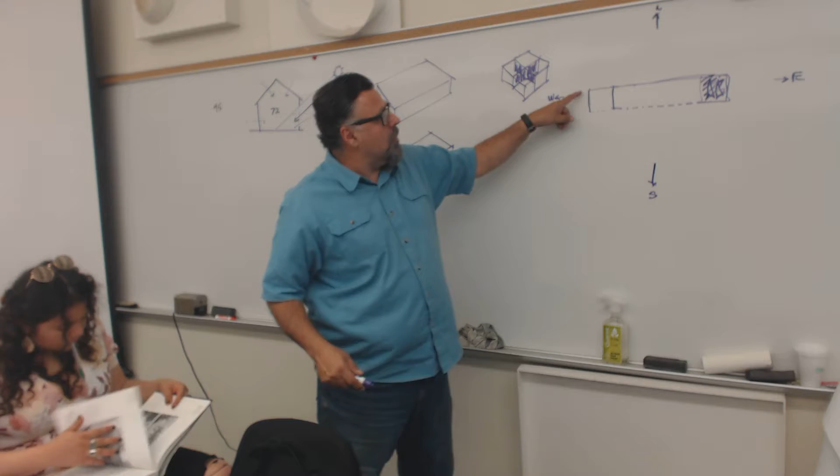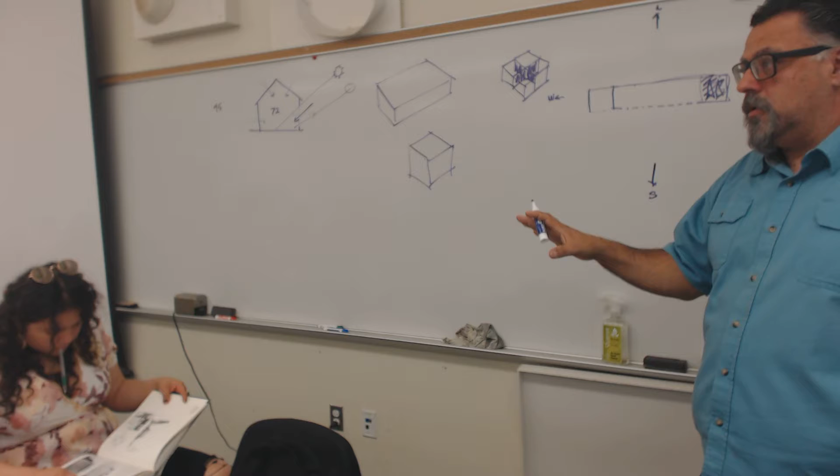Okay, so back to this thing—blind over in here. Let me ask a second question. Again, there is no one right answer to any of this. I'm showing you a potential strategy. That strategy of keeping the building compact is another strategy. Which one works better? I don't know. Which one is more appropriate for the conditions on the site? I don't know—that's up to you to discover.

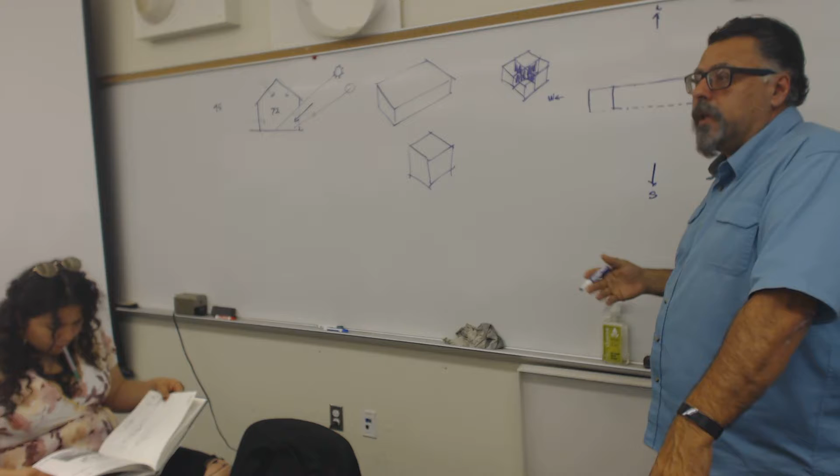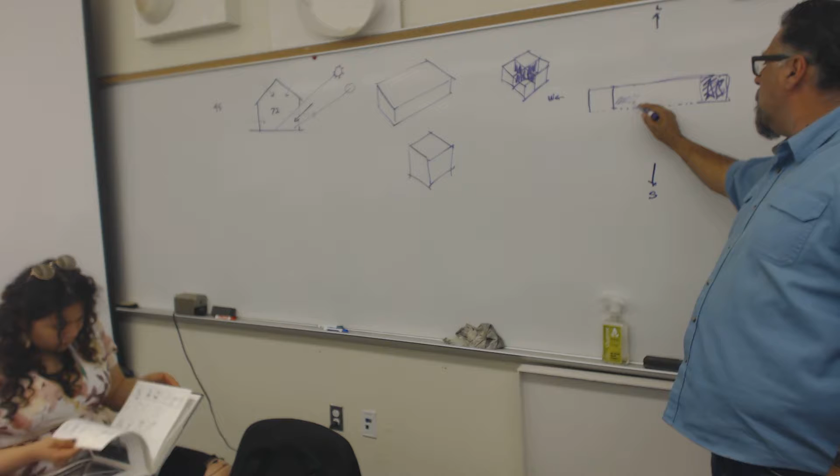But let's talk for a moment about what you're going to be reading about over the weekend, which is passive solar. We know we want a southern exposure with lots of windows so the sun can come in and heat up an area inside the building. But buildings have rooms inside of them, don't they? So one way to approach this might be to put a corridor here and have the rooms off of that corridor.

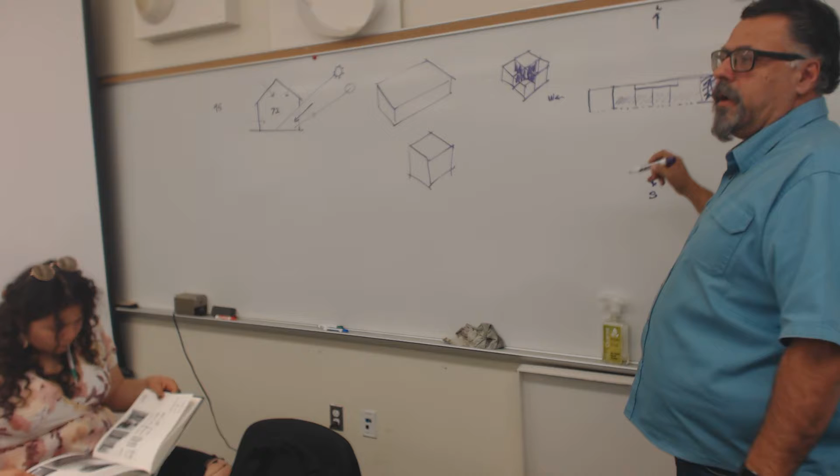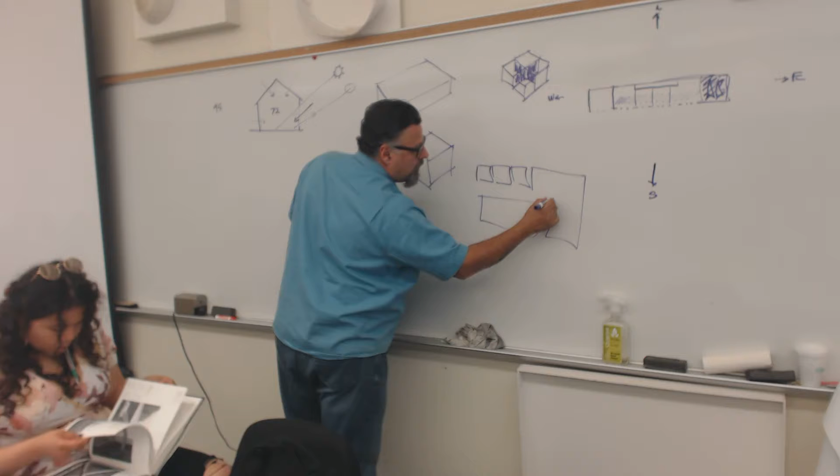So if we do that, do all the rooms pretty much have access to the sun? They do. What happens if you do a different design where you have rooms here and rooms up here, and you put a corridor in between them? Do any of these rooms, or the back of this room, get any of the sun? That causes a problem, right?

Now, there are ways to migrate heat from one area to another. So let me ask a question—do any of you remember from the reading what were the 3 types of passive solar systems?

Isolated heat gain is one type. Another is direct heat gain, and indirect heat gain. The two you're most likely to use are direct gain and isolated gain. It's up to you if you want to use indirect gain.

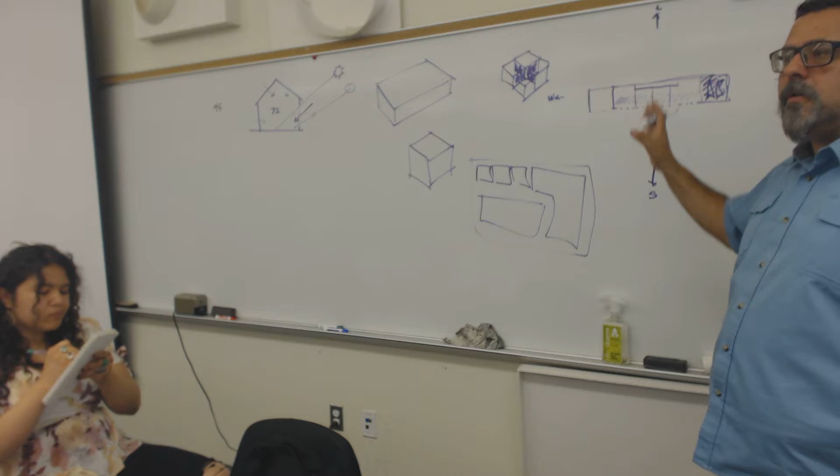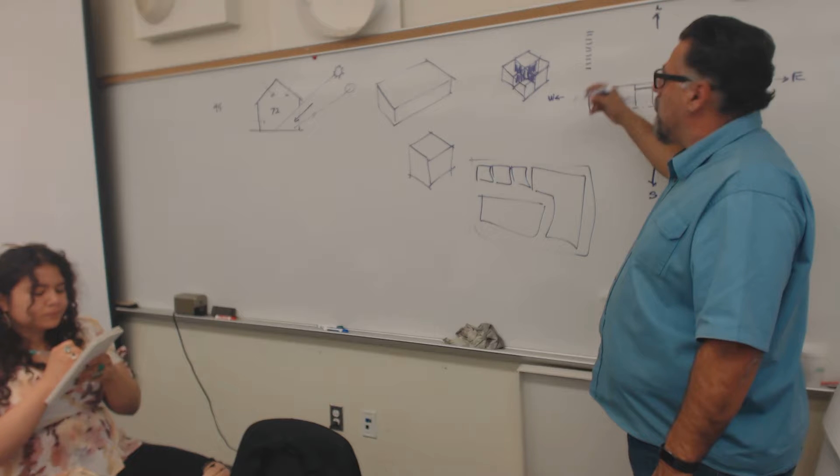So one scenario is elongation east-west. We talked about placing a garage to the east or west and putting a patio with a vertical blind or louver to one side. Another option, if you have operable louvers, is to turn them to let the light in, and turn them a different direction when you want to block the sun.

If you do a little research on the Kaufmann house in Palm Springs, you'll see it has a lanai on the second story, and Richard Neutra put adjustable aluminum louvers across the entire western side of that thing. You actually have to unscrew the hinge and move them. It's kind of cool—of course I was barefoot because you weren't allowed to wear shoes in the house.

Cross ventilation is another issue you guys are going to be reading about. Can you spell that? The house, Kaufmann? Sure.

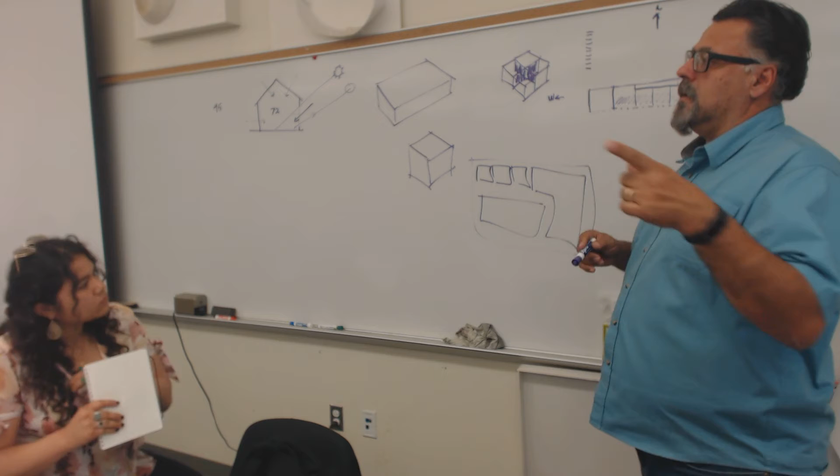Kaufman. Have you ever heard of Falling Water by Frank Lloyd Wright? That's the Kaufmann residence in Pennsylvania. The Kaufmann residence in Palm Springs is the same family, but done by Richard Neutra.

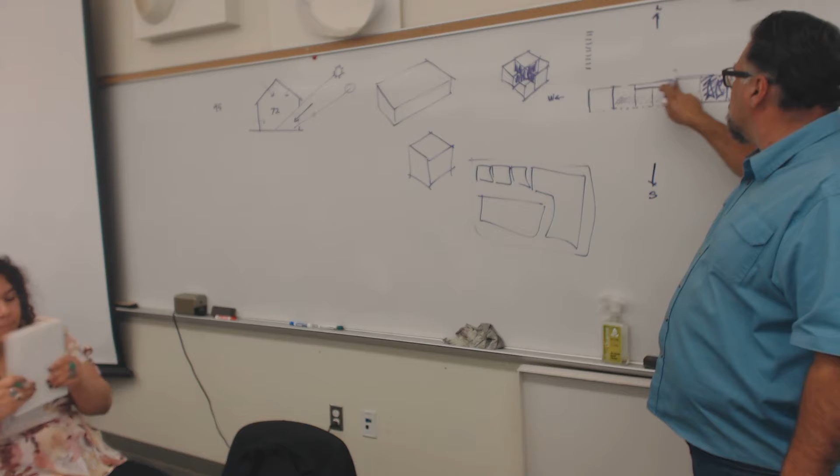So cross ventilation—here's another thing about the elongation east-west and the potential for cross ventilation. If I have windows along here, and some windows back in here, and maybe up high inside these rooms, the wind can come through this thing and get out the other side.

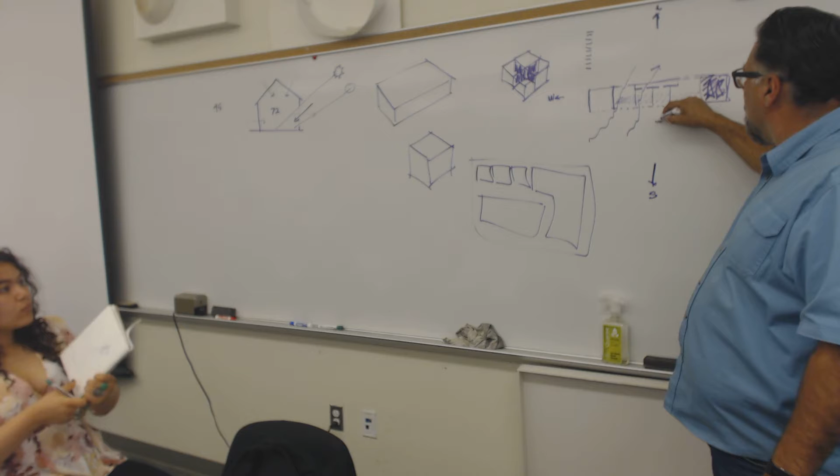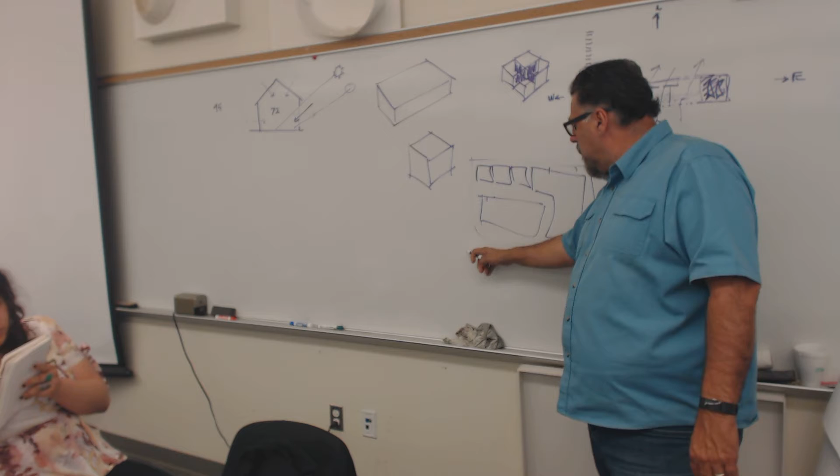But when I stack the rooms really deep, it becomes harder—not impossible, but harder to cross-ventilate. If this is a big room with doors and windows back here, the air creates a positive pressure here, and it eventually works its way out the back.

So there are different strategies for different things. You can, if you want, elongate something and create another piece that goes that way—that's an L shape. So how you deal with this exposure is different than how you deal with that exposure.

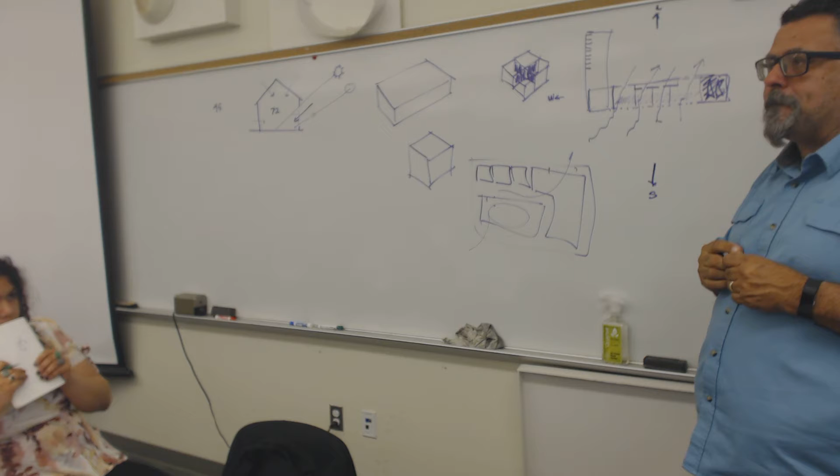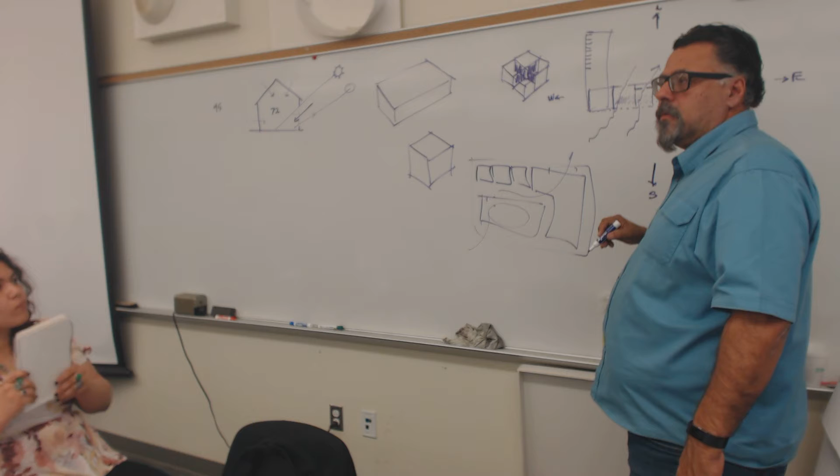So I got a question—let's say I have an elongated space like that and I want to let sun into it. What do I do? How many minutes am I at? Till 12 minutes. So let's say I want to let sunlight into this area back here, but it's nowhere near the south. What do I do?

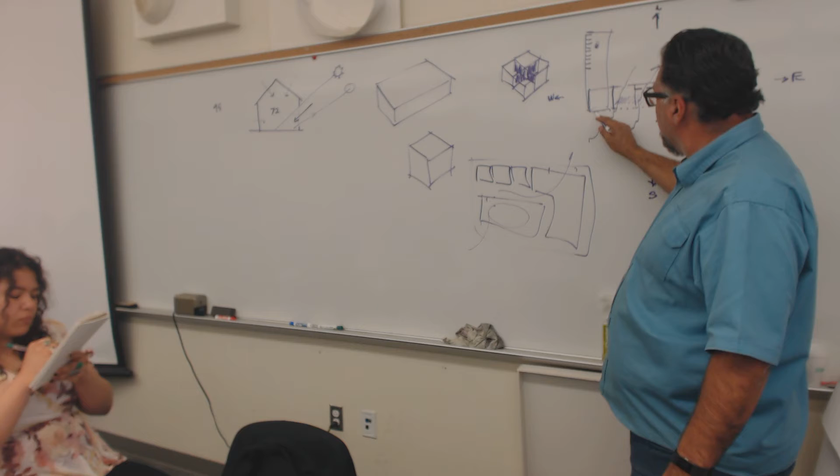Skylight's one option. Can you control the light coming into a skylight? Solar tubes aren't really going to give you solar radiation landing on a piece of thermal mass.

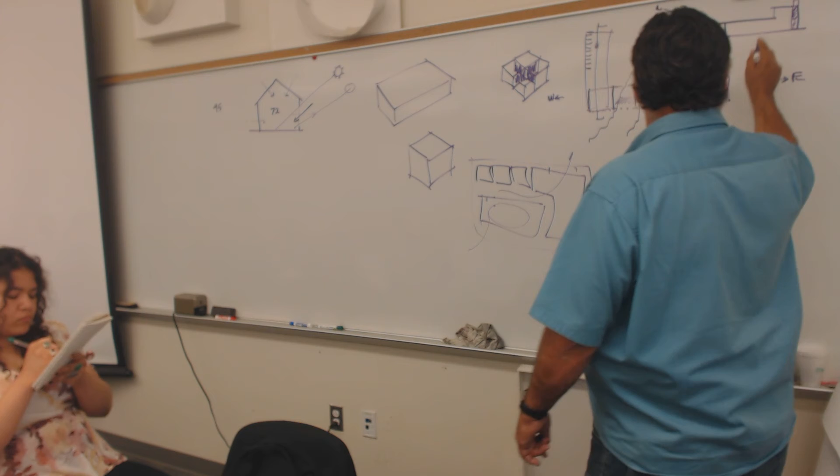Let's cut a section through here and look at a section that could work. Say I have this flat roof and a room here. What happens if I create a tall two-story area here with windows facing south, and a chimney right here made out of concrete, brick, or block? Can the sun get in and heat up that masonry? Yeah—so sectional quality is going to be another factor you guys can consider.

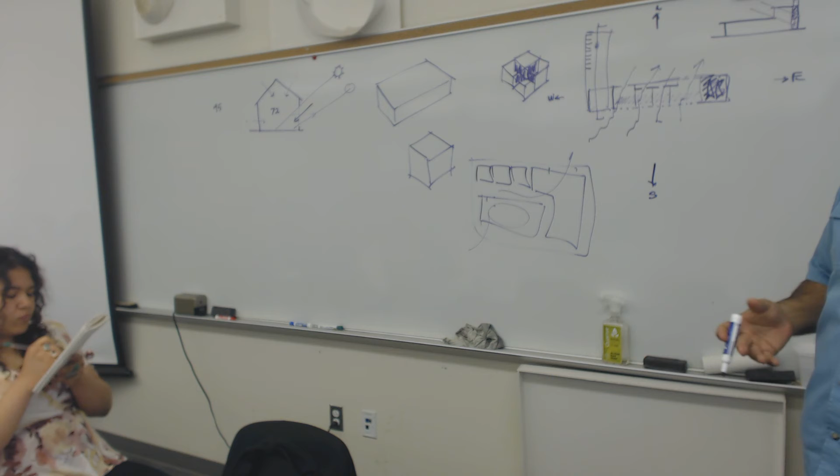One interesting thing is that your site slopes this way. So technically you could step the building down the hill and have multiple areas that let light into something facing east, facing north-south, elongated in the north-south direction—which is the opposite of elongating this way. What it looks like doesn't have to be a box.

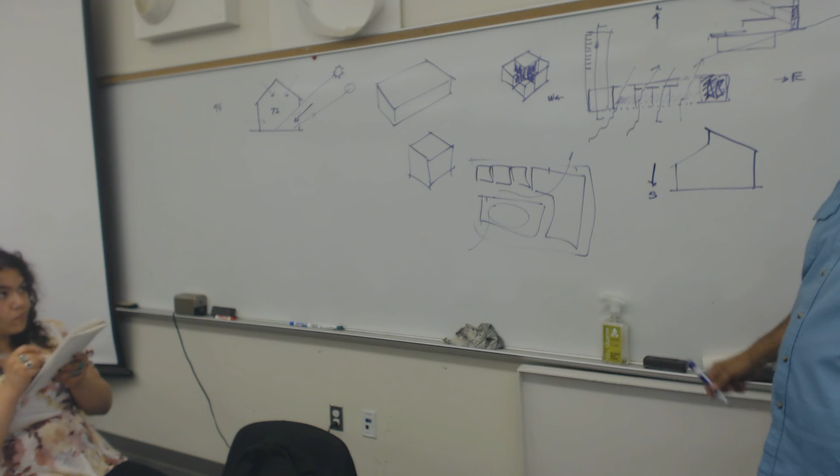It doesn't have to be like the guy I worked for—Brooks Cavan was one of my mentors. I always joked with him later in life that his buildings always looked like this, because a lot of them did—his office building, the fire station we designed, a house we designed. It was designed that way so the sun could get in and warm up an area.

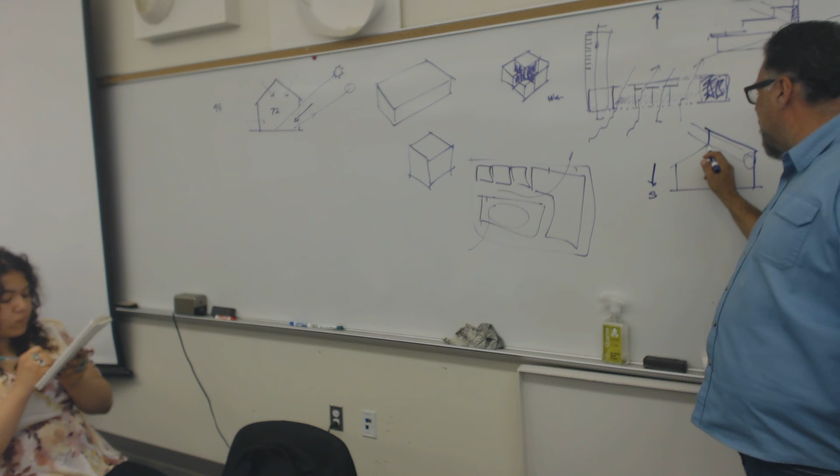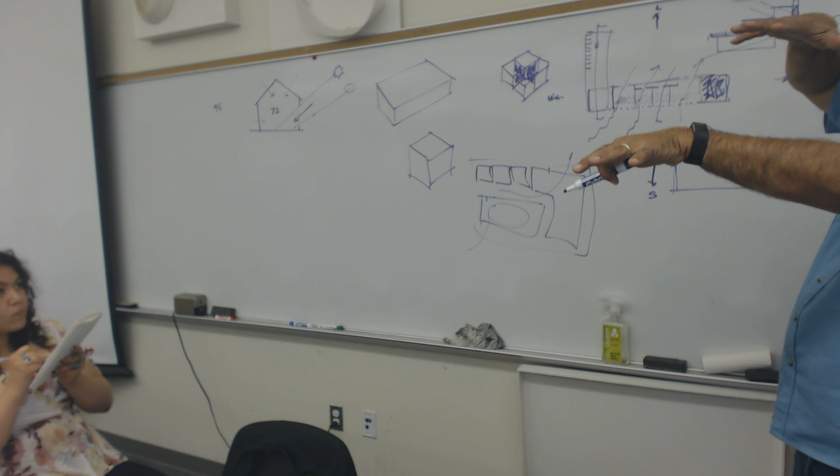But it's kind of a 70s-ish looking thing. It doesn't have to look like that—it could look more modern, a series of warping planes. It doesn't matter; the concept is that one plane is higher than the other, and there's a window there you can put an overhang on. All right, let's go ahead and stop the video.